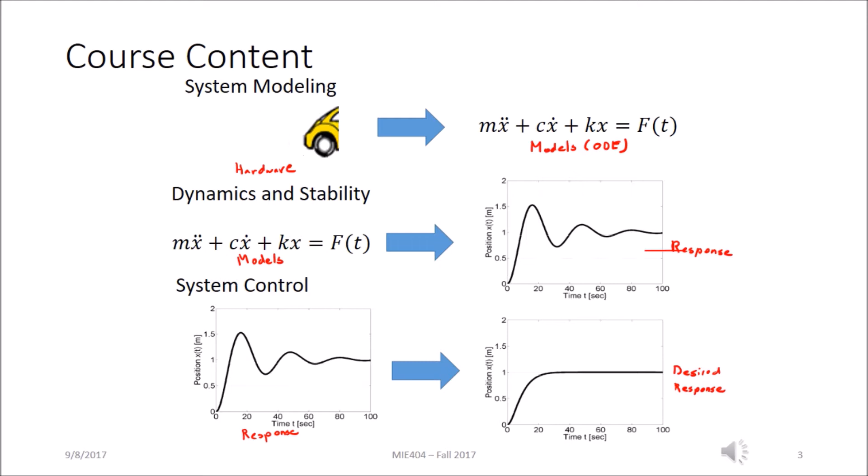We're going to do this for a range of different systems. There's lots of examples of control systems out there. The first examples were actually fully mechanical control systems, such as the flyball governor. These were developed by Watt in the 1700s, and it was used to control the speed of a steam engine, keeping it rotating at a very constant speed.

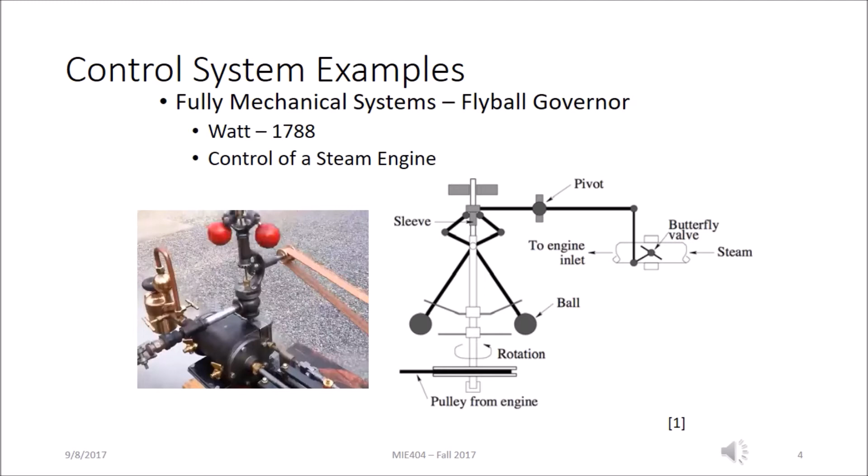You can see this control system in operation in the video on the left. As the steam engine is turning, it's connected via a belt to this mechanism you can see here with the balls rolling around. How this works to regulate the speed of the engine, trying to hold the speed very constant, is it's actually coupled to a valve. You can see the valve in this image on the right.

If for some reason the steam engine speeds up, say it's driving a locomotive going down a hill but wants to maintain a constant speed, the engine speeding up will rotate this shaft. As it speeds up, these balls move further out, and as they move out, it pulls down here. Then because of the pivot, it pulls up here, and in turn starts to close this butterfly valve. So if it speeds up, it closes the valve, providing less steam to help the engine slow back down.

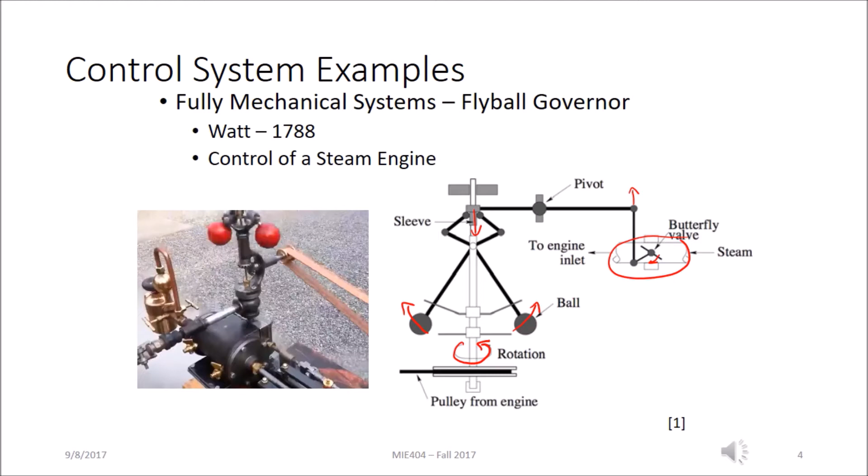Similarly, if it started to slow down for some reason, the balls would start to fall and it would open up the valve to provide more speed. So this is a purely mechanical system that takes the output from the engine speed and determines how much steam goes into the engine, and it works to regulate the speed.

There's lots of examples of control systems out there from across many different domains. In the field of robotics, controls is present in almost every single robotic system where you're trying to have any type of precise control - you have some measurement of what's going on with your system, which is then fed back to determine how to drive different motors or different inputs to the system.

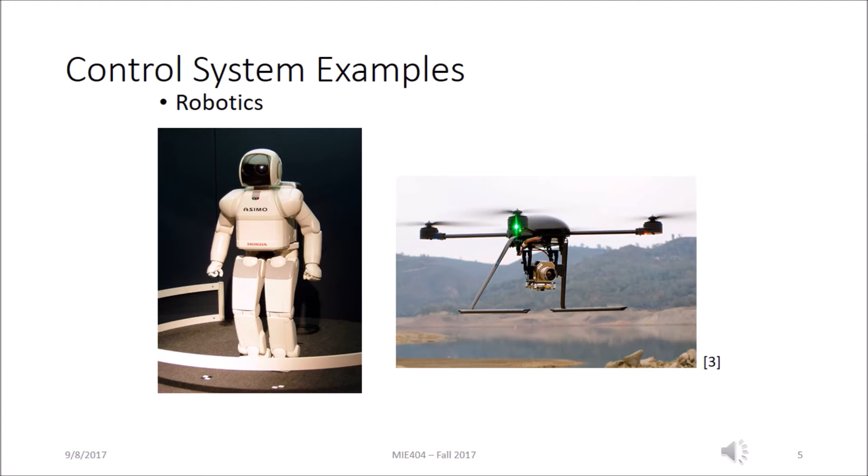Similarly, there's lots of examples from across the field of energy. If you had an example like this solar concentrator, you're trying to regulate and determine the exact position for pointing of this solar concentrator. So you could be measuring the angle and then feeding it back to control a motor to make sure that your solar concentrator is pointing where you want it to be pointing.

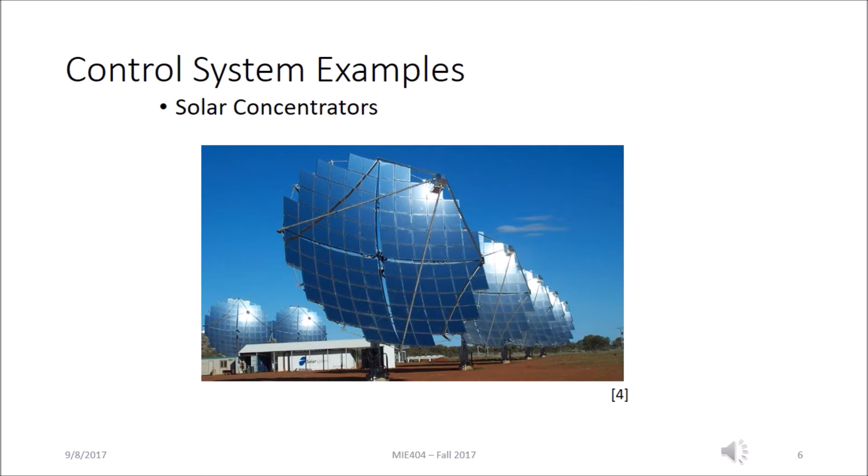With that in mind of what we actually want to do and what we're going to be talking about in this class, we can look at what are the actual objectives - what do I want you to be able to do by the time we reach Christmas. I want you to be able to look at different systems, use our knowledge of physics to develop different models for those systems, take those models and look at different properties to understand what the system stability is and how it's going to respond to different inputs.

And then we're going to use all these really cool tools to analyze the aspects of the system - root locus, Bode diagrams, which you might be familiar with from third year, and Nyquist diagrams as well - to analyze these systems and then use them to design control laws, so different logic in terms of how you take an output of a system and get your system to behave how you want it to.

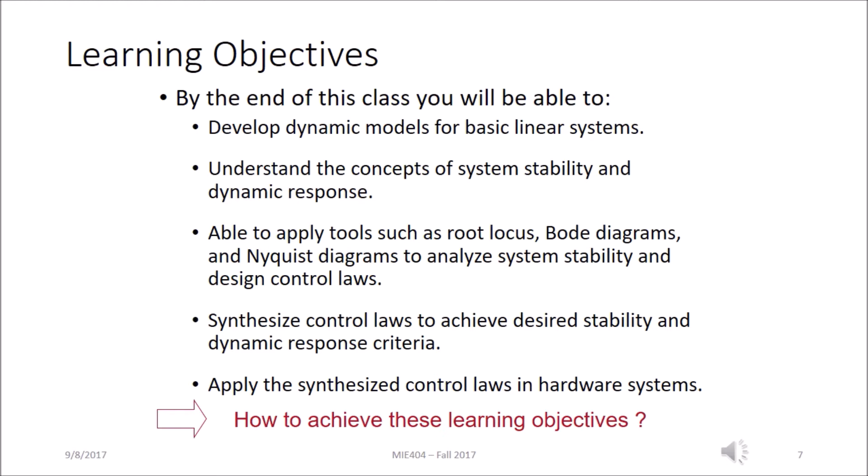And then finally, I want you to be able to apply control laws to regulate different hardware systems. How we're going to do that is through our different course components - our labs, our lectures, our tutorials, our class projects, our tests, and what we're going to be doing in our readings from the textbook.

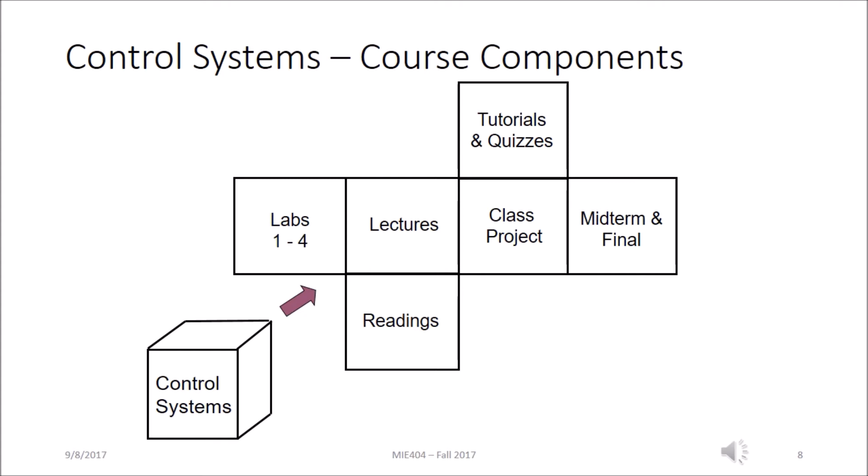Going through the different components in the course, we'll start with the labs. Labs won't actually start for a few weeks, we're going to start the week of September 25th. We're doing a slight reorganization this year, we're only going to have 4 labs, so don't all thank me at once.

We're also going to be using new sets of lab equipment. Last year we configured some new equipment, which I think is really cool, we worked really hard to put these together. We're going to use this new equipment to look at using control systems to help regulate operation of a power grid, as well as using control systems to regulate position of an airfoil in a wind tunnel, which I think is going to be great.

You're going to get a chance to work through some of that new lab equipment. You all have your lab sections defined, but there's too many of you in each section to have everyone go at once. So each section is going to be broken into 2, and I'm going to ask you to go online to specify which of those weeks you want to go: the first set of weeks, doing individual labs, or the second set. You can fill in the online form to do that.

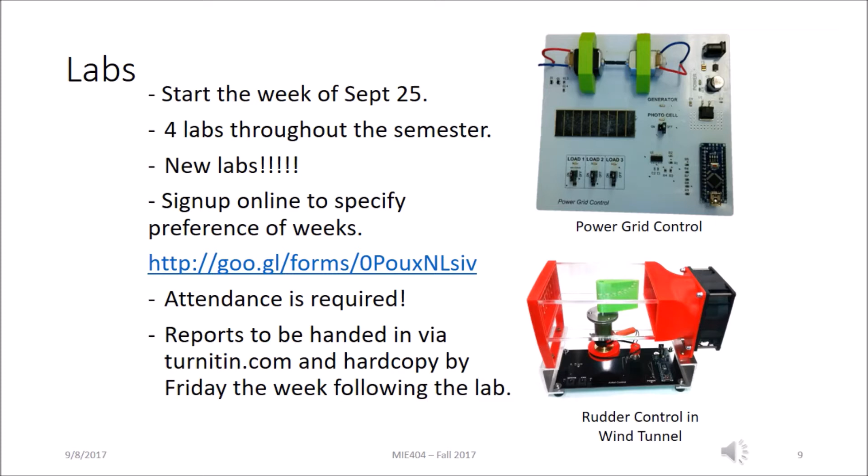For the lectures, we're going to have 2 lectures a week, one 1-hour lecture and one 2-hour lecture, both in MC 252. For that 2-hour lecture, I know it's going to be really tough to pay attention for 2 hours, it's tough for me too, so we'll take a little break in the middle.

For our lectures, we're going to be following a format very similar to what you're seeing in this video today. I'll be providing a set of base lecture notes, posted before each lecture, at least the day before. There will be some blank aspects that we're going to fill in during lecture, and I'll be posting the notes with some annotations afterward, but there may be a few additional things I bring up that might not be in the posted version online. So I really encourage you to print out those slides, bring them in with you, and fill them in with us as we go through lecture.

There's a full schedule, you can take a look at what we're going to be talking about. But really, we've got those 3 main parts I was talking about before: the modeling, dynamics and stability, and then looking at designing control laws. Finally, just at the conclusion of the class, we'll look at other ways to represent systems for controls using state space representation.

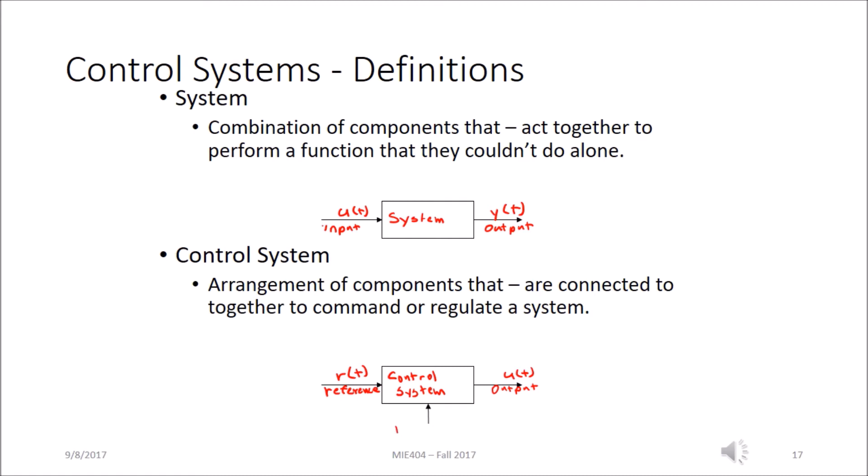And we have an output from that. In this case, it's going to be U. We're going to be taking measurements to determine what that output is. In the case of that purely mechanical flyball governor system, the measurements we were actually taking were physically measuring the speed using those balls on the flyball governor and centrifugal force, to then determine the position of that valve, which regulates the steam going into the system.

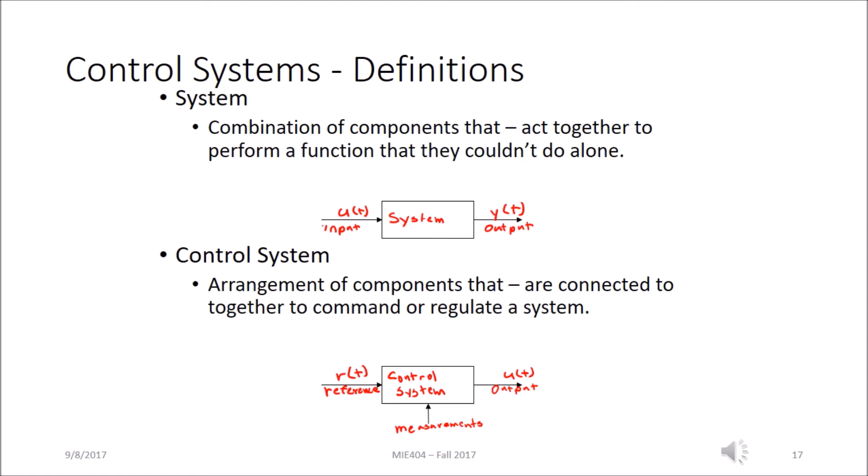Something we're going to be using throughout this course is block diagrams, and I think most of you have seen these before in some of your other courses. But what they are is they're a graphical way to represent a system. They can also be used to represent different mathematical expressions, and that's what we're going to use them for in some of our examples today. There are a number of different blocks you might have in a block diagram, but in the examples we're going to go through, there are two main types of blocks.

We're going to have a gain, where you basically are multiplying some input u by some value. So writing this out as an equation of what happens here, y is equal to k times u. So you just multiply this input by the value in the block.

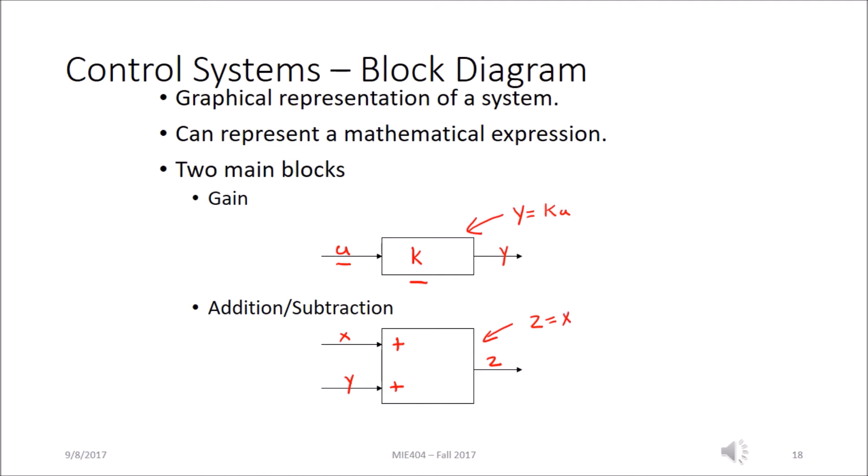You may also see blocks which are addition and subtraction. So if I'm going to have that here, I'm going to have x, y, and z. What this actually is mathematically is the same thing as saying z equals x plus y. You may also see these addition subtraction blocks drawn as a circle, with lines coming in and some plus signs next to it. So these are different ways to write out some different mathematical expressions.

Don't worry if this is a little bit confusing. The first tutorial you're going to have will go through and review block diagrams in more detail, which will prepare you for your first lab where you'll be using block diagrams in lots of detail.

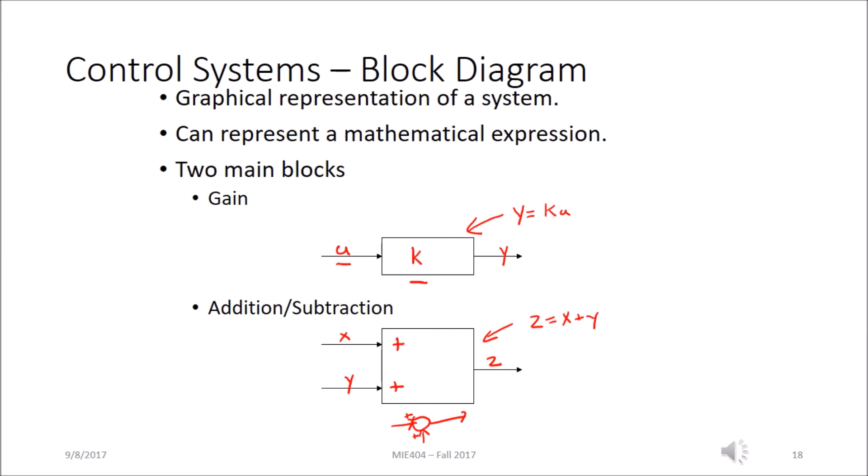So with that block diagram example and our definition of a system and control system in place, we're going to look at an example of a sun tracking heliostat and what a block diagram may look like for this particular control system.

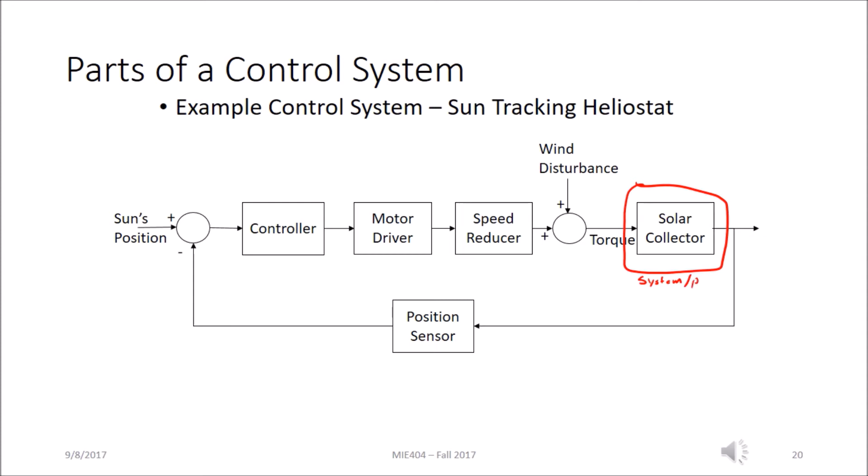Here's an expression of that sun tracking heliostat as a block diagram. We can look at this and see which part actually represents our system, or you may also hear the term plant used. We'll use it. And then we have our output, which is then being measured. So we've got measurements, which are then being used to determine the actual torque which is being applied. So that means this whole entire part is a set of components that are used together to be able to control or regulate a system. This is our control system based on the definition.

Which is taking that reference to be able to regulate the system.

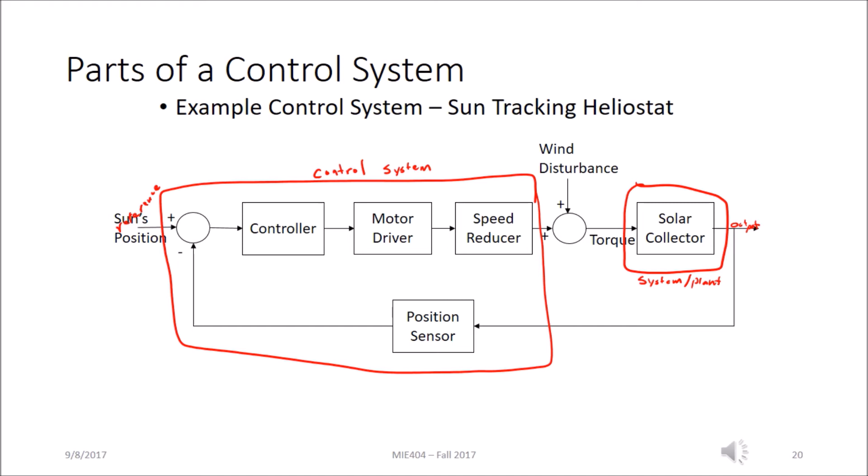So now that we have an idea of what a system is, which is a collection of components which serve a function, and a control system is a collection of components which are meant to regulate a system, we can look at two main classes of control.

So we're going to start with open loop control. In open loop control, what we have is our output from our system, y, is not fed back to be able to determine what our input is, u. So we can say the input to our system is not a function of our output. There's no measurement being done to determine what that input is.

An example of something like that is a light switch. Our input in that case is the position of the switch. Output is our lights on or off. But there's no measurement going back of what the lights are actually doing to be able to regulate what's going on.

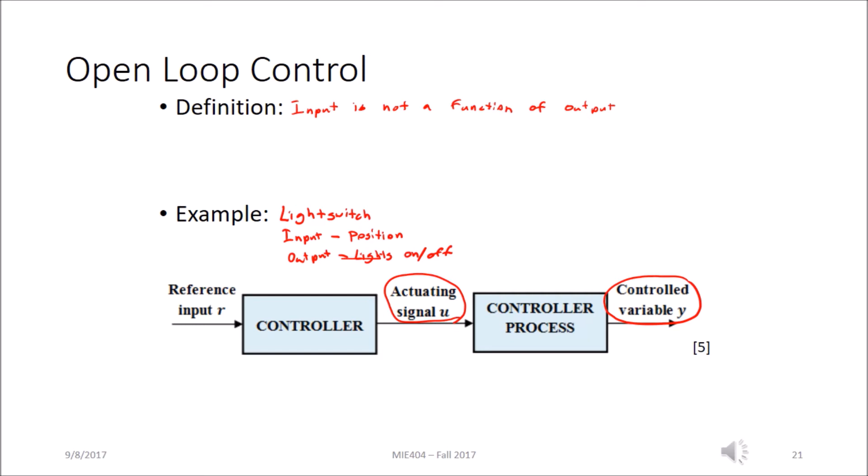So to contrast with open loop control, the other class is closed loop control, where the input to the system is a function of the output.

We're going to have lots of examples of this as we go through the class. But to start, I'm going to pose a simple thought experiment about a biology-based example.

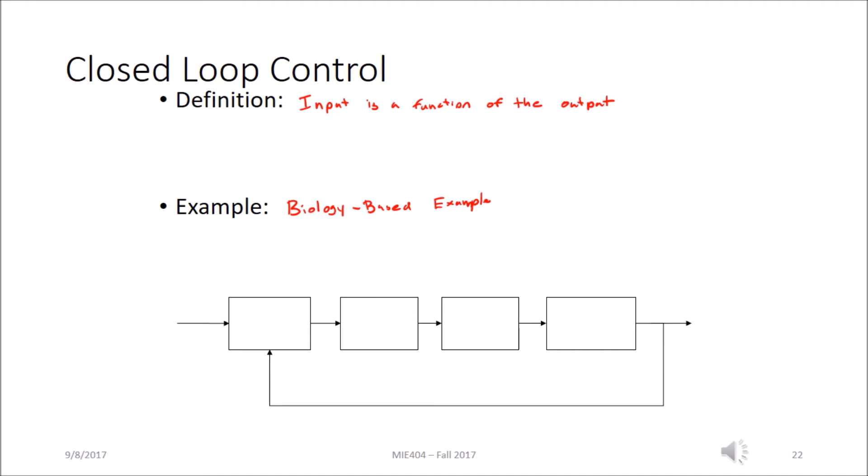Say I was going to reach out and touch an object. I'm going to tell if I'm close to that object or not by using my eyes. I'm going to have my reference of the object I want to touch, and my position of my finger that I'm looking at and measuring and feeding back. Then what I'm seeing is being processed by my brain. And then I move my muscles to move my finger to touch the object.

So here we have our eyes, these are our sensors to be able to tell what we're doing. Our brain is our controller. Muscles are actuators, and the finger, this is our system, our plant.

So in closed loop control, what you're doing is you're taking measurements, feeding it back, and using it to determine your input as a function of those measurements of your output.

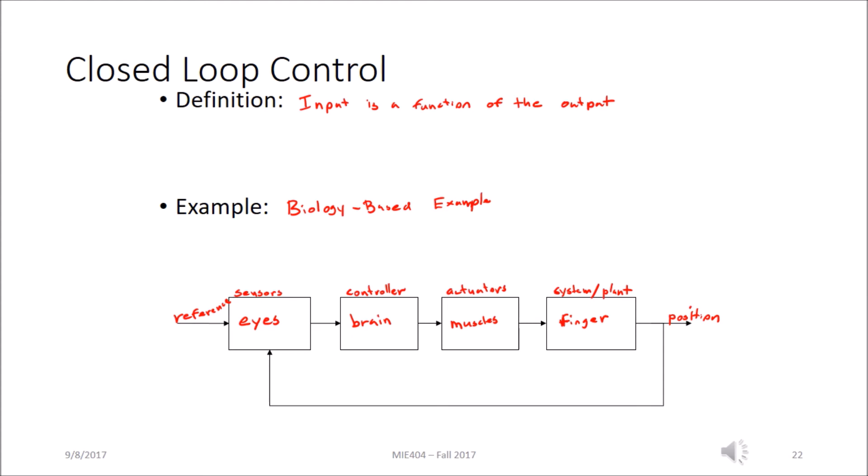So let's think of another biology-based example of a control system. In Vietnam, there's crazy traffic everywhere. As a driver of a motorcycle, you need to be able to look and observe your environment and then provide feedback to determine where you're going to go. They even need to be able to think about crazy pedestrians that might go out and cross the road, like this.

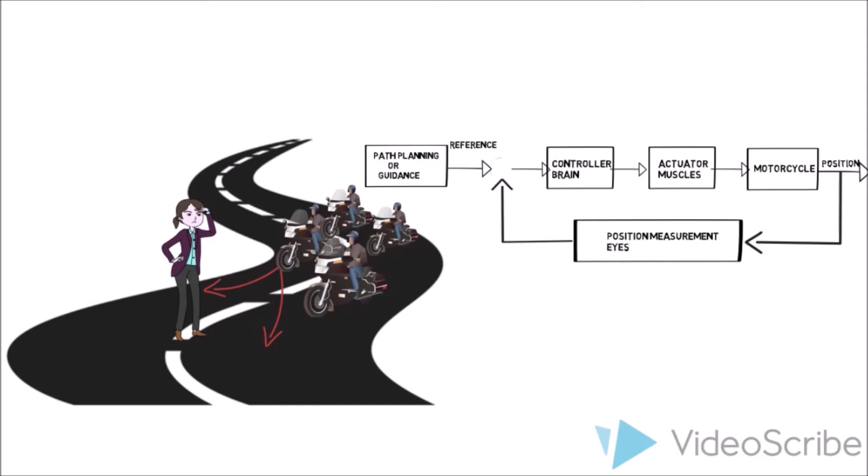So we're going to be seeing a lot of diagrams that are going to look something like this as we go through the semester. Just to clarify what's meant by some of these boxes you're going to see in this diagram: if we're looking at these control elements here, what's really meant by that is the control logic that we're going to be talking about.

Actuators, and electronics. So those control elements, they use that feedback signal from the feedback elements, and really what I'm meaning here is sensors.

And the last part I want to clarify here is what's actually meant by disturbance. Really, a disturbance is anything that, when you're going through and developing your model of your system or your plant, is unmodeled.

So it could be, if you're thinking about that solar concentrator, it could be wind hitting that solar concentrator. It's not something you have modeled, and it's going to cause some disturbance to your system.

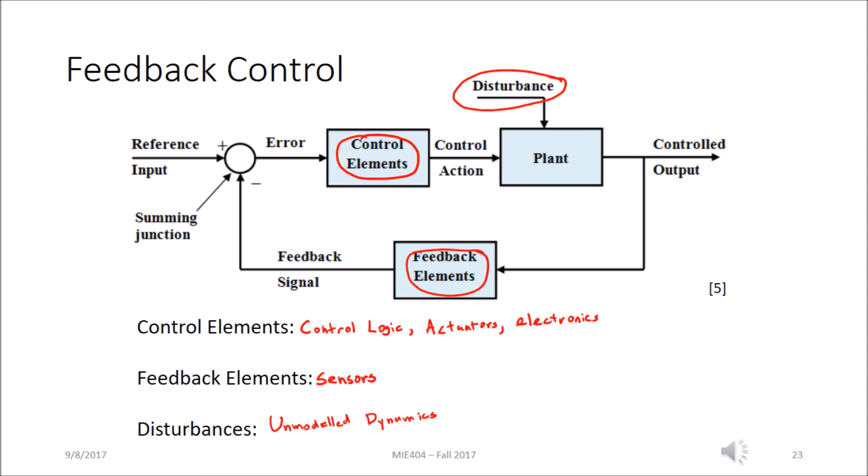So there's two main types of controllers that we're going to be talking about in the scope of this class. We're going to be talking about regulators, which is something which is trying to control the output as close as possible to a constant desired value. So when you're thinking about regulators, that flyball governor is an example. It was able to regulate the speed of that steam engine.

You can think of lots of other examples. Thermostats, regulating a constant temperature, cruise control, regulating a constant speed for a vehicle.

But you could also have a controller which is trying to track something that might be varying over time, trying to track it as closely as it possibly can. So you can think of things that are changing over time - that might be different robotics types of applications, self-driving cars, and lots of other examples.

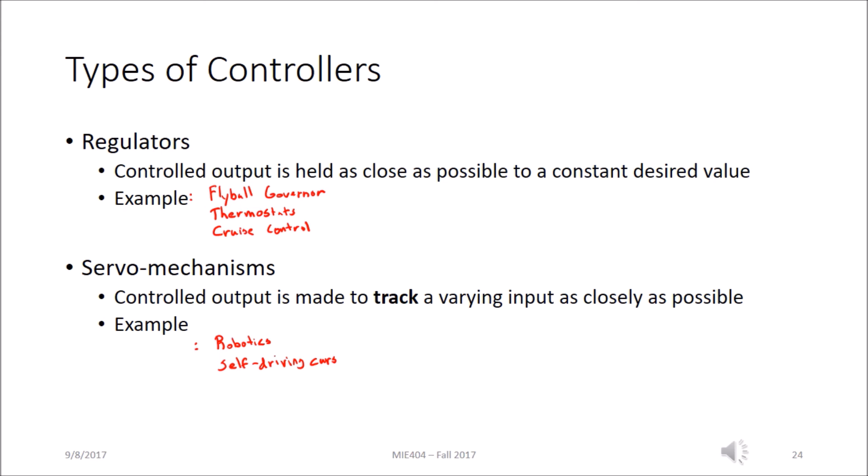So we've talked a little bit about feedback control, or closed-loop control. So why do you think you might want to use feedback? Thinking about that example of the solar concentrator, let's think about if it's windy. If it's windy, you might not be able to track the sun very well. But if you have feedback control, you can actually reduce the sensitivity to those types of disturbances or unmodeled dynamics.

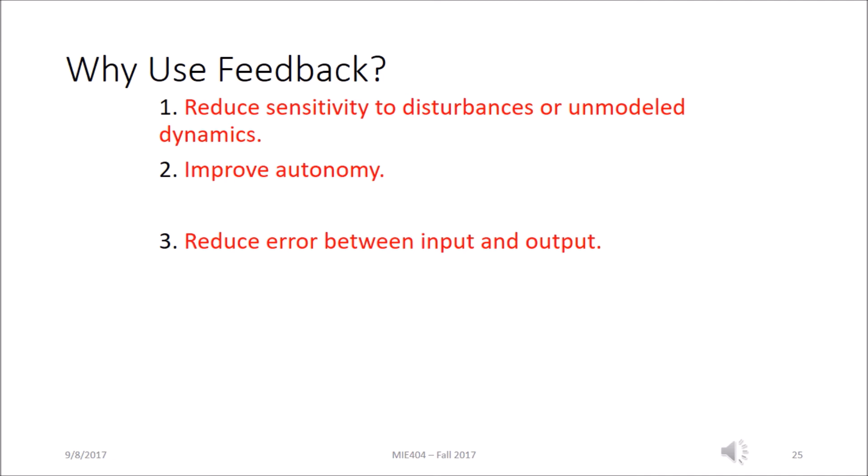We can also improve the system autonomy, making it so a system can operate without continuous human intervention. We can make it so our system has better agreement between a reference and our output. We'll talk a little bit more about what this means later in the class, but we can actually improve the stability of our system, and we'll show this later in the class as well. We can actually make our system respond quicker.

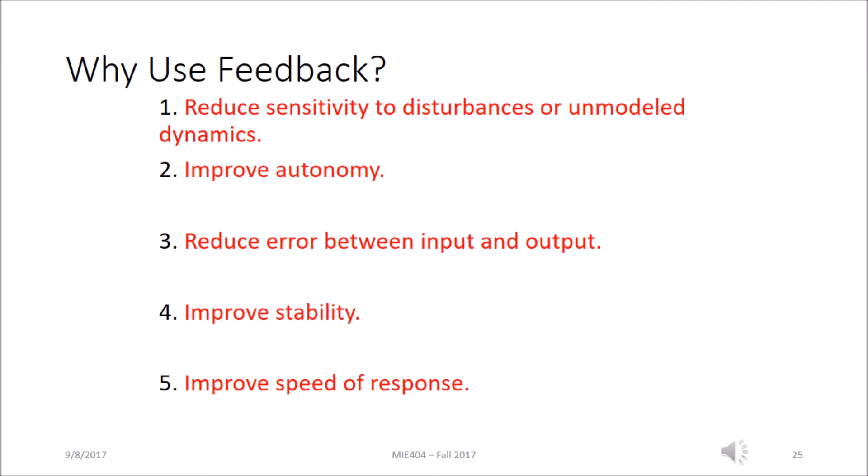So we're going to take a quick look at feedback control and understand how it actually helps get your output to match your input. We're going to look at an example of controlling the speed of a vehicle, or cruise control. We're going to choose some value for this controller that's going to allow us to get that actual speed to match the desired speed for our cruise control.

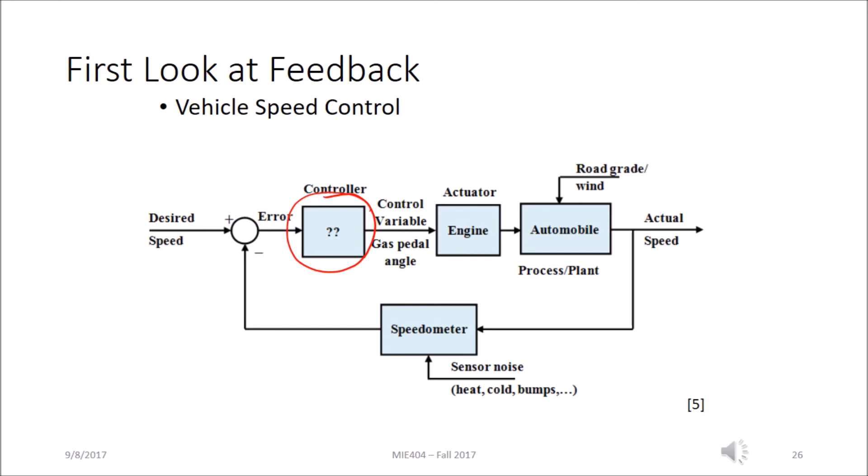Okay, so before we look at what the feedback case looks like, we're going to start with an open loop case. Let's say we want to be able to match that output speed y equal to our input r, so y equal to our reference r. In order to take a look at this, we're going to start by writing out the block diagram algebra. We're going to say y is equal to 10 times the sum of u minus 0.5 w. We can expand this out because u is equal to k times r.

Since w can be positive or negative, and we can only choose one value, the goal here is to determine what that k constant is. We'll make the assumption that w is 0, and we want y to equal r. So therefore we have k equals 1 over 10. So we've got y equals r minus 5w.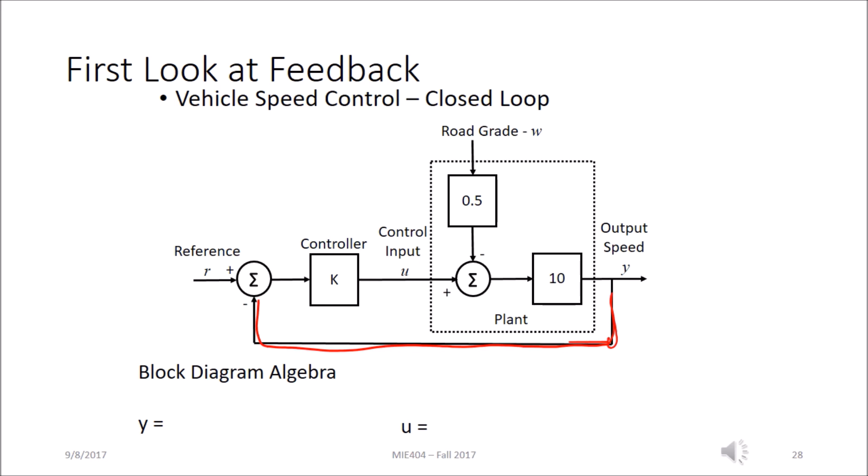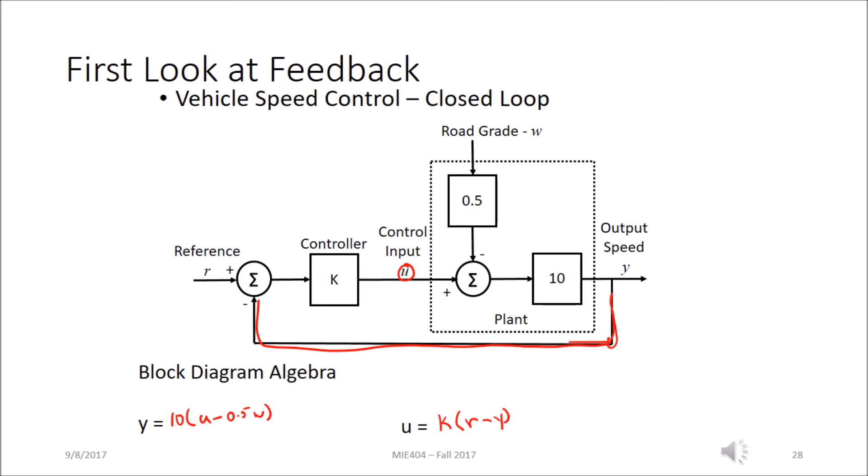Let's start doing some quick algebra. We're going to write out what y equals again. y is going to be 10 times, similarly to before, u minus 0.5w. This is the same as what we had before. But now u is equal to k times r minus y, so a little bit different. Let's combine those two equations.

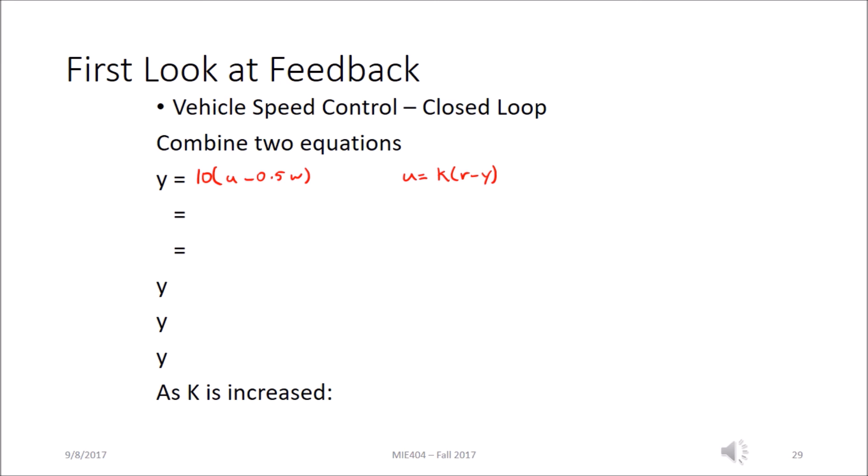We can substitute u into the equation for y, and expand things out. Let's rearrange things here, and do a little bit of cleaning up. So we've got an expression here for the output y.

Let's say we choose a value for k the same as what we had before. If we do that, we would have the following: there'd be a slight difference between y and r, very, very small, but the sensitivity to the noise or the road grade is much decreased.

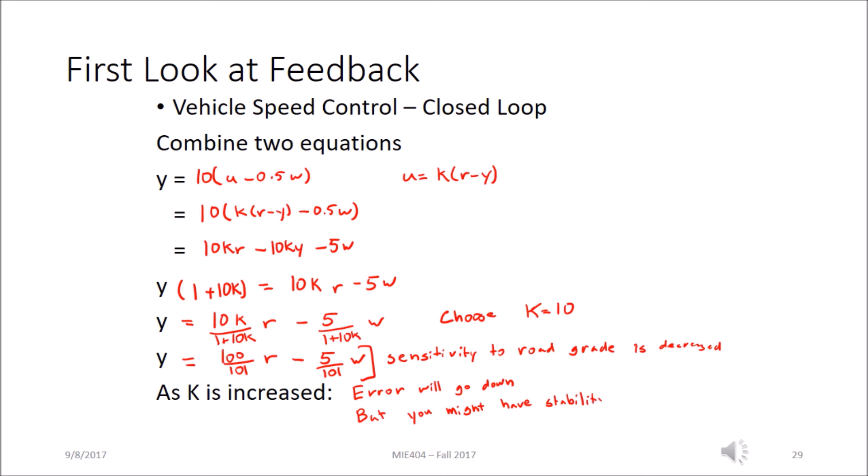So feedback can have a huge impact to be able to make sure that you're able to get your output to match your input when you have this type of noise.

So just to wrap up this lecture, what is it really that we're going to be doing in controls, and what are the objectives of controls engineers? Really, what you want to do as a control engineer is select and put together control system components to achieve a desired system performance. That's looking at being able to choose everything from sensors, actuators, and control logic, etc., to make it happen.

The first step to get there is to really understand what's going on with the system and how the control logic influences the system performance. So that all starts with development of simple models and then analyzing the properties. This is really what we're going to be doing next.

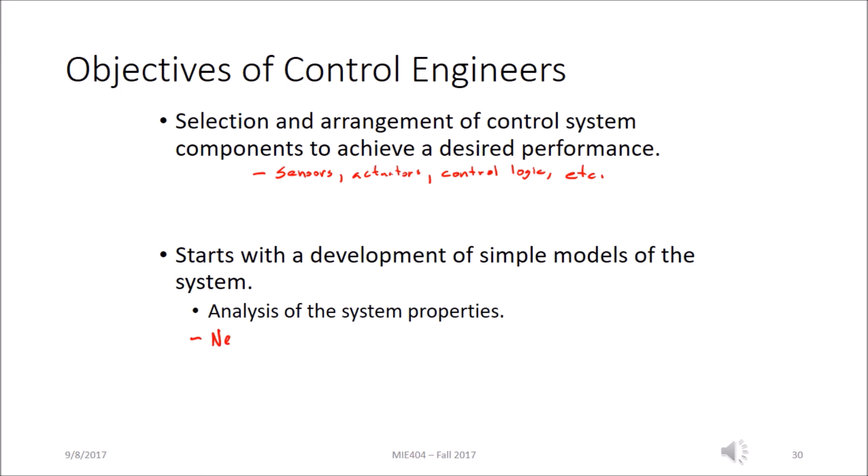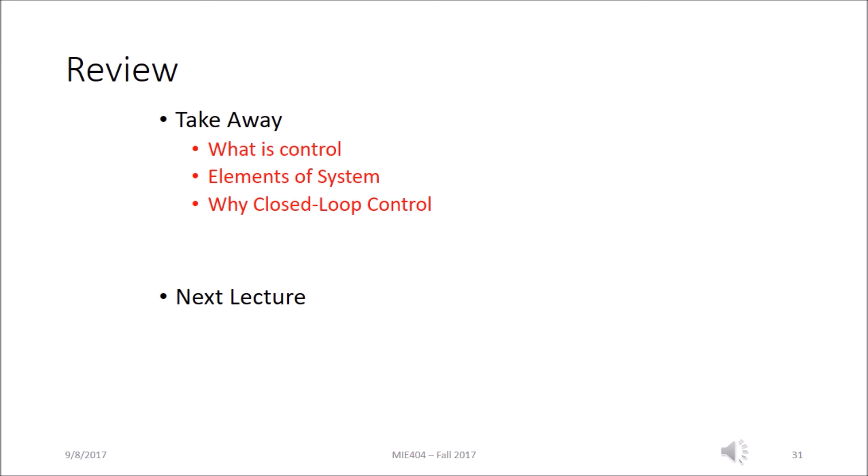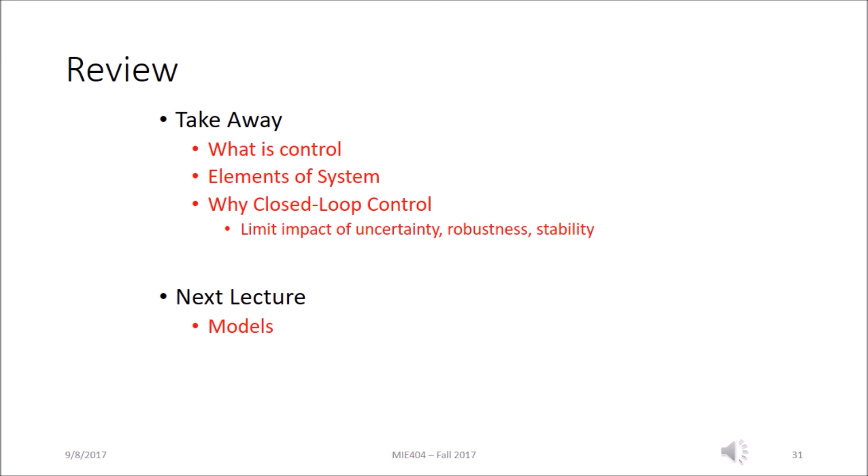Okay, so just quickly review what we talked about today, and what I want you to really remember from this section of the class is what is control? Really being able to take information about our system, make our system do what we want it to do. What are the elements of that control system, and why you want closed loop control? In the end, that's to be able to limit the impact of uncertainty, increase robustness, and improve stability. We're going to be starting talking about models in the next lecture. I'm looking forward to meeting you and talking to you about models.